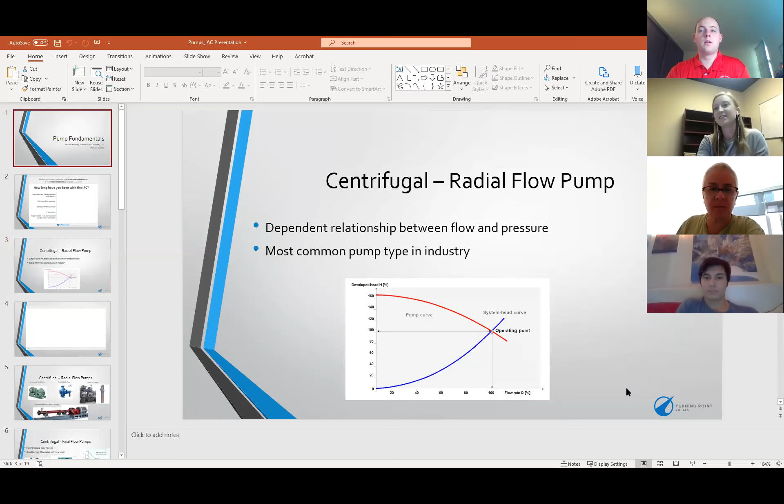As Julie said, I am an alumni of the U and of the IAC. I studied mechanical engineering while I was there and had a great time working with the IAC. Can everyone see my PowerPoint? Awesome, okay, so let's get started.

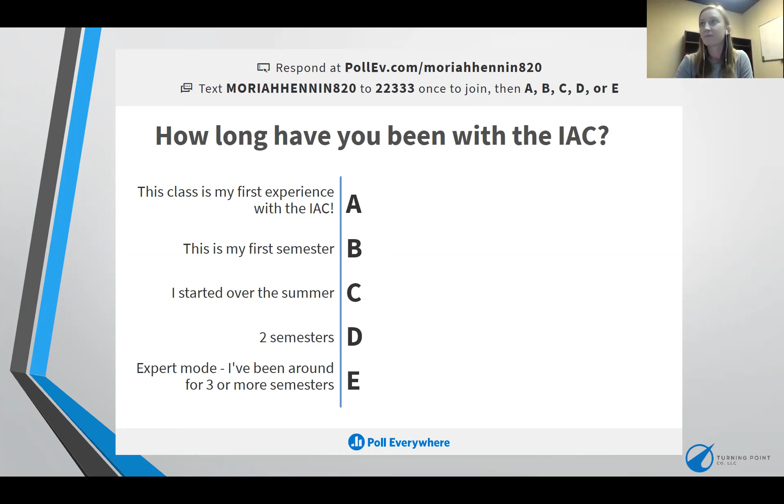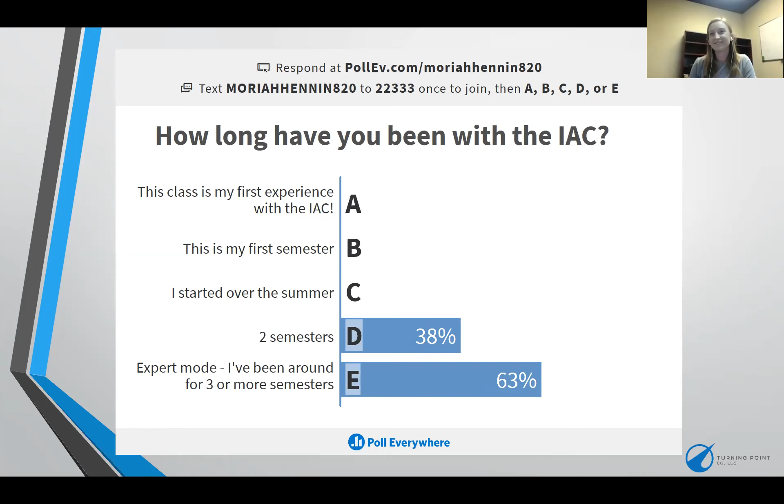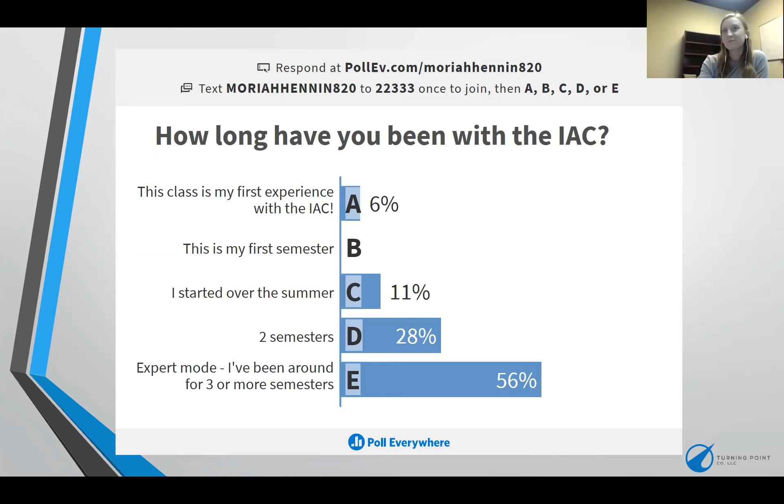Ooh, 2 semesters. This is cool, I've never used this before. Fun to see it in real time. Really awesome. You're seeing, by the way, Moriah, that right now our ebb and flow of the team is a little more veteran than typical, which is also kind of nice, which is really cool. Unexpected COVID positivity. It seems like answers have stopped coming in, so I'll move on. But cool, thanks for responding, guys. That's fun to see.

So getting right into it, I'm just going to go over some pump basics. So talk about a few different types of pumps, what those might look like if you're actually on site, and then go into more calculation-based, how are you finding the energy that those pumps are using. Then I'll specifically look at a situation where you have a throttle valve and a variable frequency drive, or VFD, and how you would compare those two. And then I'll also give you a quick overview of other things to pay attention to, and save some time at the end for questions.

So starting out, we've got centrifugal pumps, radial flow specifically. These are the most common types of pumps that I've seen in industry. They are good because they can deal with a pretty wide range of flow rates and pressures, and you are going to have a dependent relationship, which means as your flow rate changes, your pressure is going to be affected by that.

So, in the screen, let me see a second. Can you see my mouse? Yes? No? I see some yes and some no. Let's see if I can. I see the mouse now, Moriah. Okay, I think I need to change it to the laser pointer.

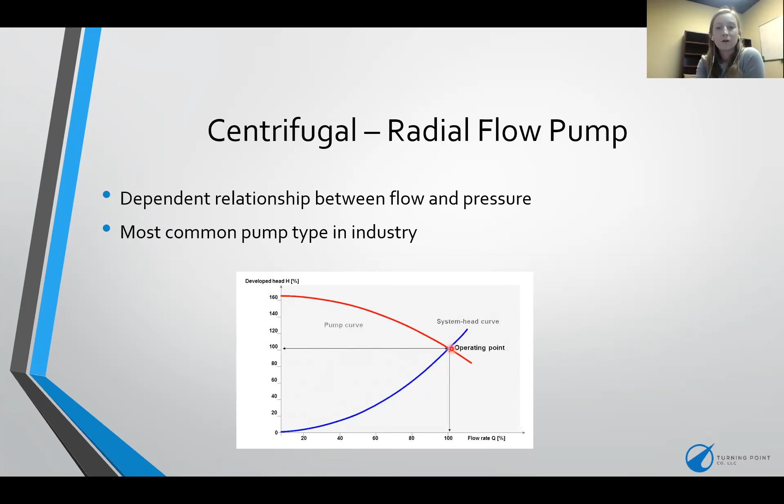Two really basic questions, if I could jump in on that previous slide. Can you tell the team how, just for starters, they would identify the type of pump and where they would get the curve?

Yeah, so on the next slide I have some pictures of pumps, so I will go into that. This right here is an example of a centrifugal radial flow pump. You can tell because it has an impeller, which, the rotating impeller is going to create a vacuum, pulling fluid in and pushing it out at a different pressure.

And so that's, sorry, things are popping up. Can you guys see that? Oh no. I'm able to see the pump. Okay, sorry, I had another screen pop up, so I was blocking it. We'll just go to the next slide. Sorry, y'all.

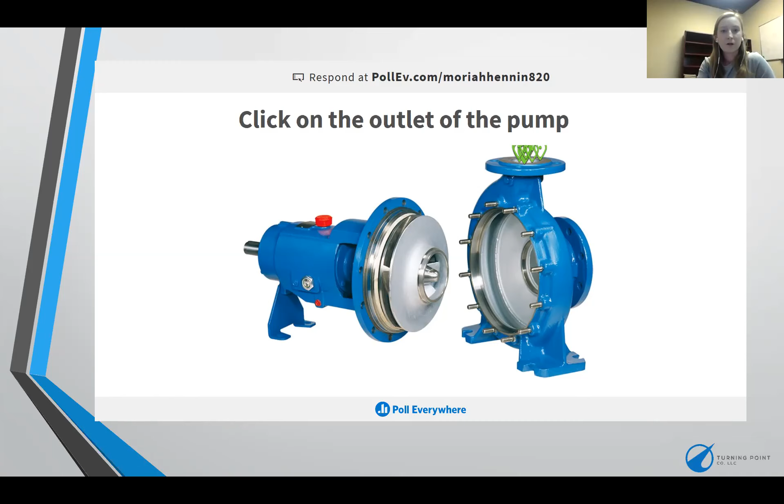Let's go to the next slide. Here's several different examples of radial flow pumps. So this is the same pump we were just looking at, except closed. And then you've got one with a horizontal split case.

The split casing is determined by your impeller direction. So if the impeller is going up and down this way, and your casing splits vertically around the impeller, then it's that radial split case. In this case, it's perpendicular to the impeller, so you've got that horizontal split case.

And then these are some multi-stage pumps, so you're not going to have just that one kind of container for the impeller. You'd have several impellers all along this multi-stage.

And you see this more in pipelines, which is something that I've seen quite a bit, where they're trying to pump further distances, so they need to get up to higher pressure. So you're going to have multiple impellers in line to get up to those higher pressures and pump further down.

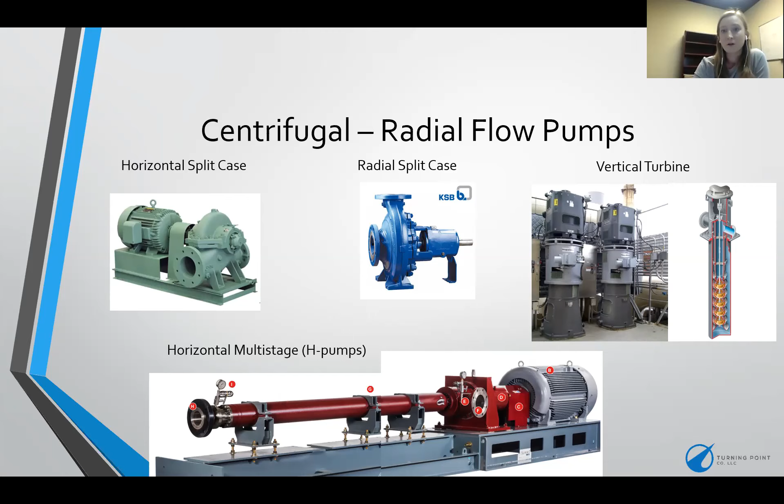So maybe when you're at the U and they're trying to pump all around the campus, they might need a multi-stage pump. I'm not sure on that one, but a different kind of pump that is not as common, but you could see, is a centrifugal axial flow.

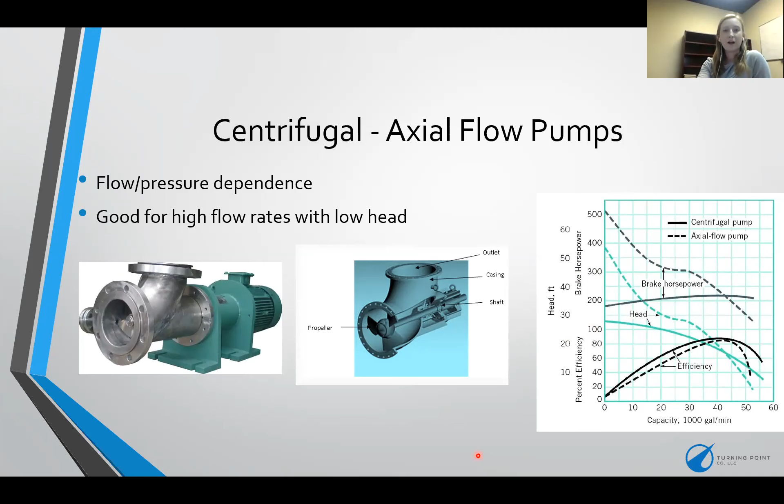And then the last type of pump, one of the three we're talking about, is the positive displacement pump. With this one, you have an independent relationship between flow and pressure, meaning you're going to have that set flow rate, and your pressure could be anywhere along this line.

It's defined by the system, and then your flow rate is going to be defined by the pump speed. So if your system's friction is changing—if you add a new pipeline to it, if you add maybe some turns in the pipe—then your pressure will go up, but the flow rate will remain the same.

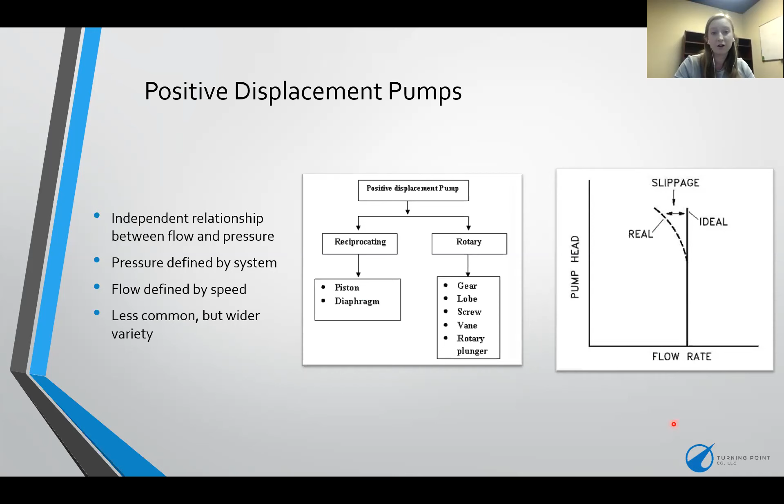So if you're trying to have really consistent flow rates and you don't have as high of pressure, the positive displacement pumps can be a really good option. They also have a lot of different variety in them.

So when you're looking around the site and see a pump that doesn't look quite normal, maybe it's a gear pump, which is just like interlocking gears. You've got lobe pumps, which are similar but more rounded gears. A screw pump is kind of like a rotary screw compressor—same idea, coming in and building up the pressure to the outlet.

So I haven't seen positive displacement pumps very much on sites. I think they're usually used for smaller flow rates, and yeah, they're not as common, but they do exist. They are out there. The only time I've seen a gear pump was actually in a research and development lab.

They were very good for very precise measurements of liquids. Otherwise, I haven't seen anything like this either. So, right—what do you consider smaller flow rates?

I mean, the pumps I deal with are usually pretty minimum big, like thousands of GPM. So small flow rates would be anything under 50 GPM maybe.

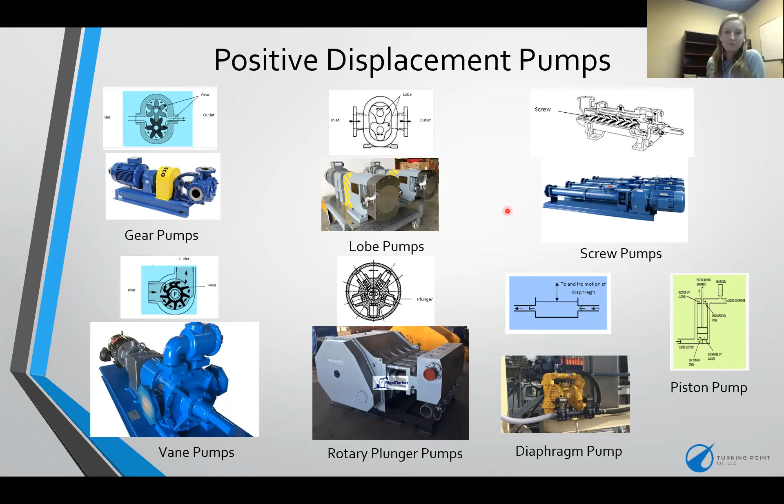So to answer Julie's question of where do you find those pump curves, I will address that in a later slide. I do have some resources for you all that are useful in finding pump curves, especially if you have manufacturer info on the pumps. So before we get to that, I'll jump into some common ways to calculate the energy a pump uses.

Affinity laws are the general way to compare different situations around pumps and fans. These apply to both. The basics are that your shaft speed is proportional to your flow rate, so if you have a motor that's at 50% speed, the flow rate will be 50% of the full capacity. This is useful because you can apply it to both the pressure head and power of the pump. The power is proportional to the cube of the shaft speed or your flow rate. So if you know the power a pump is using at full speed, its rated speed, and you have a flow rate you want to reduce it to, you could calculate the necessary speed of the pump.

This also works with a changing impeller diameter. One thing you'll sometimes see is that you can trim off around the diameter of the impeller, and that does the same thing as changing the speed. So rather than it being RPM 2 over RPM 1, it'd be diameter 2 over diameter 1.

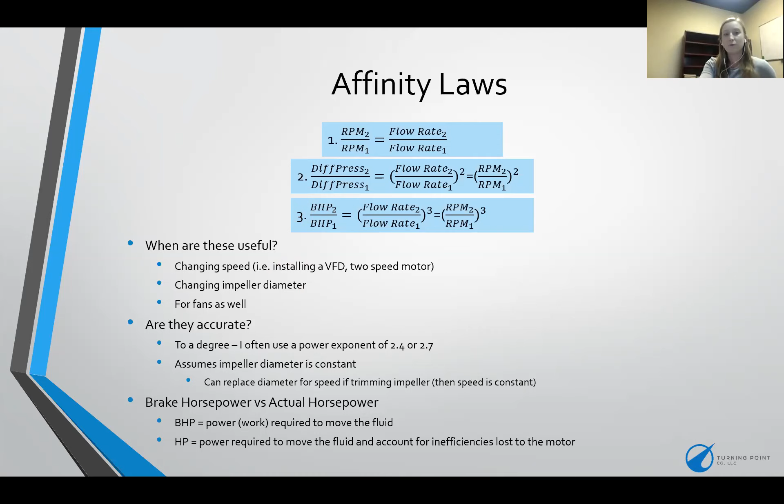So now the question is, if we want to know what the power is at a full flow rate, how do we find that? The answer is the pump power equation. Some of you have probably seen this, especially more experienced people. Pump power is just pressure times flow rate divided by your efficiency.

So I have a couple with units here that I find useful. If you have your head pressure in feet, then 3960 is your constant on the bottom to convert, and if you have your pressure in psig, then 1714 is that useful constant.

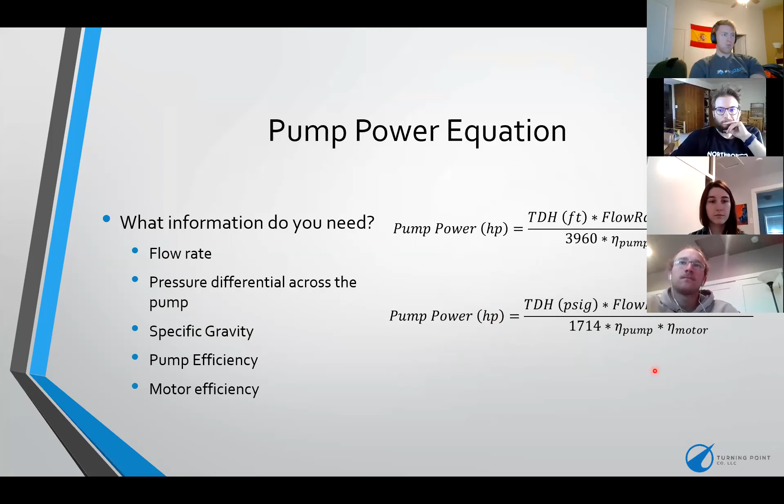The other thing to note with the pump power equation is that specific gravity plays a role. I'm actually realizing my bottom equation should not include specific gravity because your pressure would already account for that. But if you have your flow rate, or your head in feet, then specific gravity or your density has an impact on that pressure.

So if it's just water, then it's 1, and this equation is usually pretty spot on if you know your pump and motor efficiencies. If your specific gravity starts to get too far away from 1, or you have a slurry, then this equation may not be as accurate. So just something to keep in mind.

And so then for pump and motor efficiency, a good rule of thumb for pump efficiency is 65%, and for motor efficiency either 95% or finding NEMA efficiency tables online. NEMA is your motor rating, which most of you probably have seen on the motor nameplates. But 95% if you don't know is a good guess, and 65% for the pump efficiency. But if you have the curve, then you should be able to know that pump efficiency.

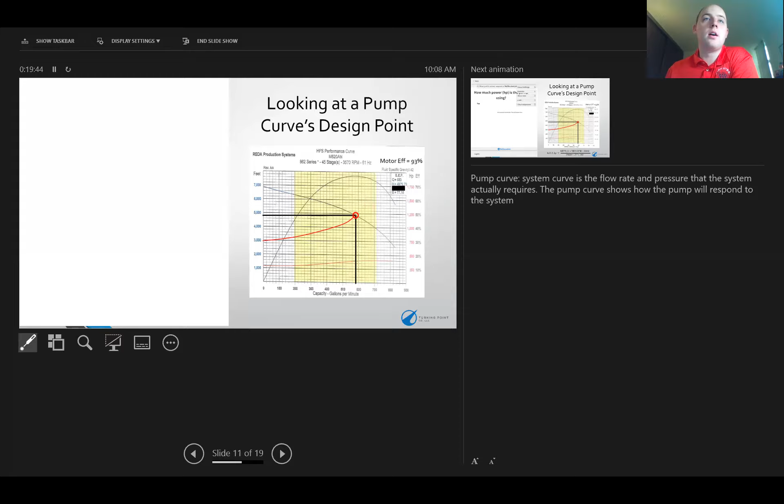Maybe. Are you all seeing the notes? Yeah, we can see the notes. Okay. If you go up to the left side to the display settings, it might let you switch screen. Looks good now? Yeah, just okay, the presentation mode. Cool. Can you guys see the question, or is it just a blank screen? All right. I cannot see a question right now. Okay, that's okay.

So I have an example pump curve here. The blue line is your pump curve, and I drew a red system curve there, which is your estimated point of where the pump is operating. If you guys want to try and use that pump power equation, we can talk about where you get each of the components from the curve.

Oh, I think it's finally loading. There we go, we got one answer in already. I'll give it a second. So do you guys need that equation again? Keep going. I could see the equation again. Okay. So it is, if I can pull it up here. Sorry y'all, I think these polls, I like the idea, but they're making the PowerPoint very slow.

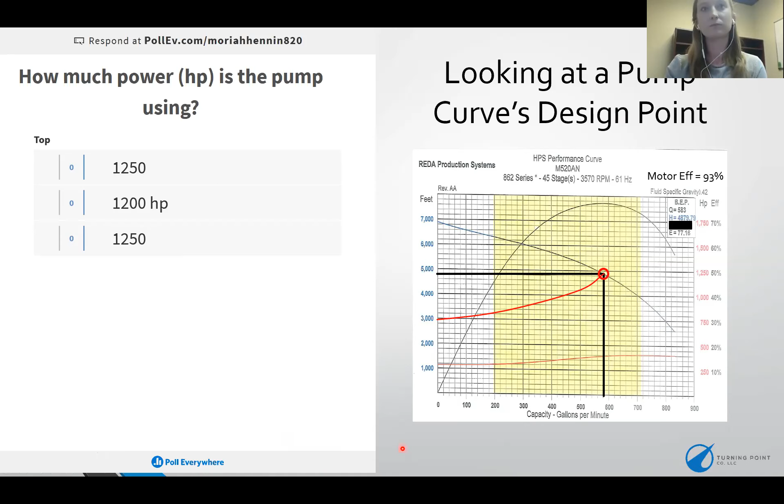Okay, so here's our equation again. We've got our head times our flow rate times our specific gravity, divided by 3960, times your pump efficiency times your motor efficiency. And I gave you a motor efficiency in that one of 95%, or 93%, I think.

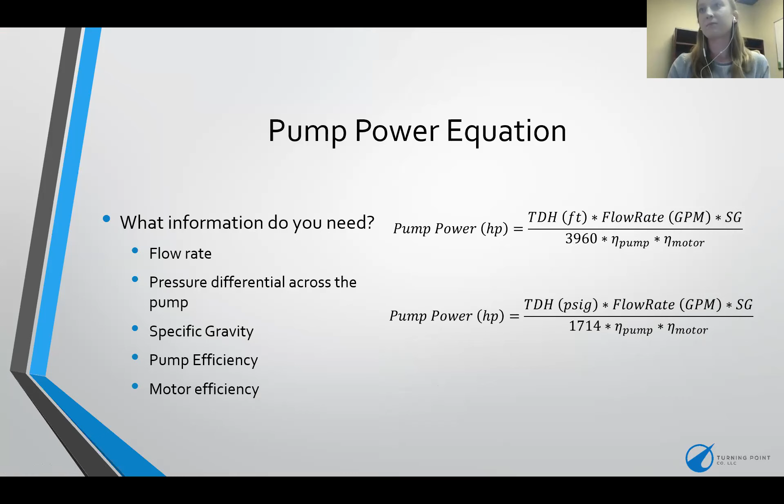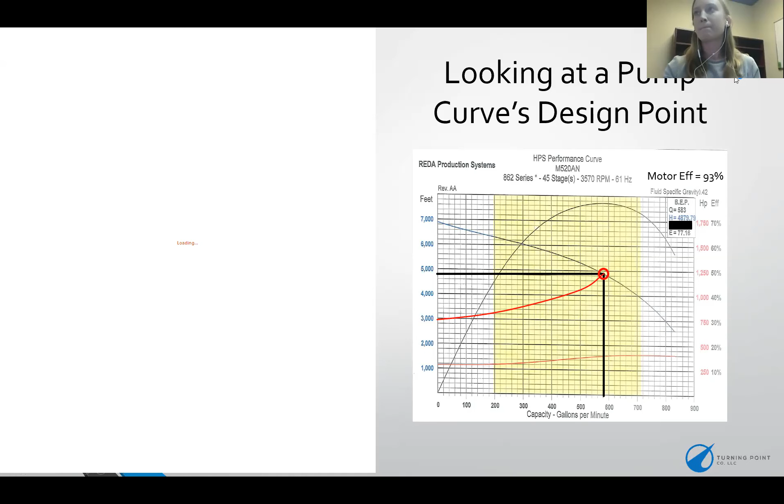Go back here. Oh, no. Okay, well, fortunately... okay, so it doesn't seem to be working, unfortunately, but we will go over it. I saw some answers of around 1250. So, does anyone want—I'll walk through what I have, and then if anyone wants to ask questions or say how they got to their answer, we can talk about that too.

This little box right here shows actually your design point, but it could be anywhere around 4,900, 4,800 feet for your head. This black line shows you right here, and then your flow rate is this other vertical black line, so you got 583 GPM. Your specific gravity was actually right up here in the corner. With the motor efficiency of 93%, specific gravity is 0.42, divide that by your 3960, and then pump efficiency—if we just follow this line straight up to the efficiency curve, and then over to the right.

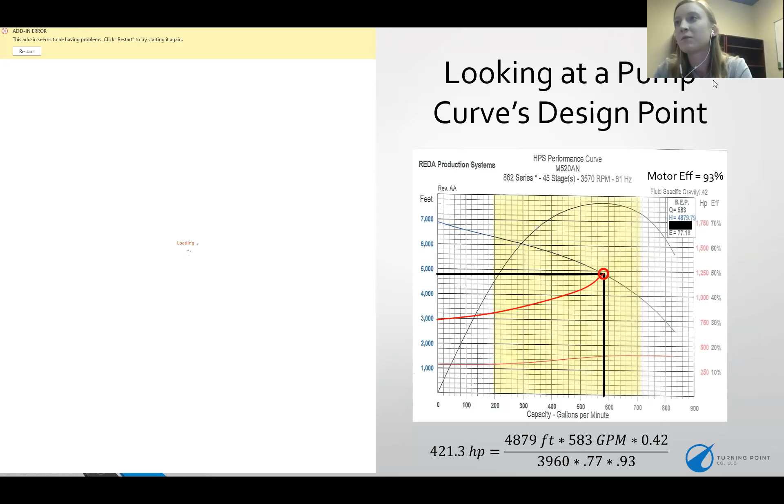And you guys can't see your faces, can you? No, that's in the way of mine. I'm sorry, I'm not used to Zoom. What was your question, Moriah? Your faces are all on my slide, so I didn't know if that was blocking your view of the curve. I can see it, yeah, I can see the curve.

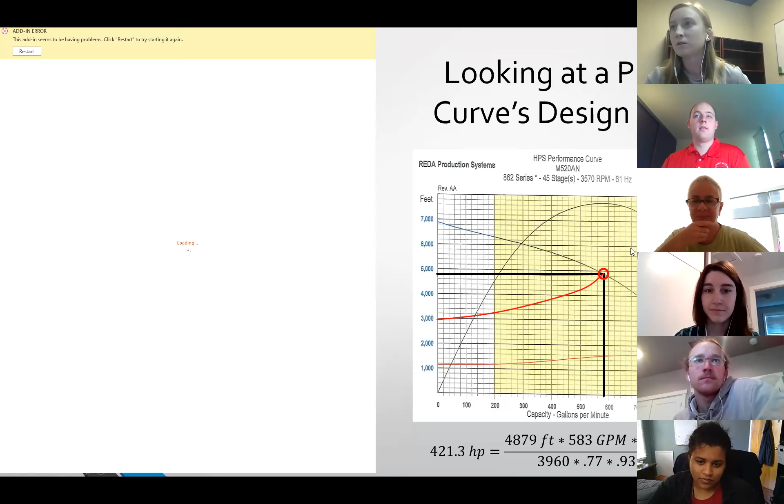Perfect, okay. So if we follow this point up and then go over to the right, our efficiency is just around 77%. So then we take 77% pump efficiency, 93% motor efficiency, for a horsepower around 421. So if you have anywhere around there, that's about where we're looking.

I think we all did horribly. Did anyone have thoughts or questions on why any of these numbers are the way they are? Suddenly a couple of our students are getting it right. I don't know how they did that.

Awesome, Moriah, how did you eyeball such specific numbers? That's one thing that occurred to me as you were going through it. Yeah, so I didn't actually eyeball those—if you notice, I cheated. There's a box right here that gives you the best efficiency point. So I used the values given in the best efficiency point, which is this operating point right here. So if you had anywhere close to those values in this scenario, that would be totally fine. I just used that best efficiency point, which is, as you can see, the highest point on the efficiency curve, to direct my calculations.

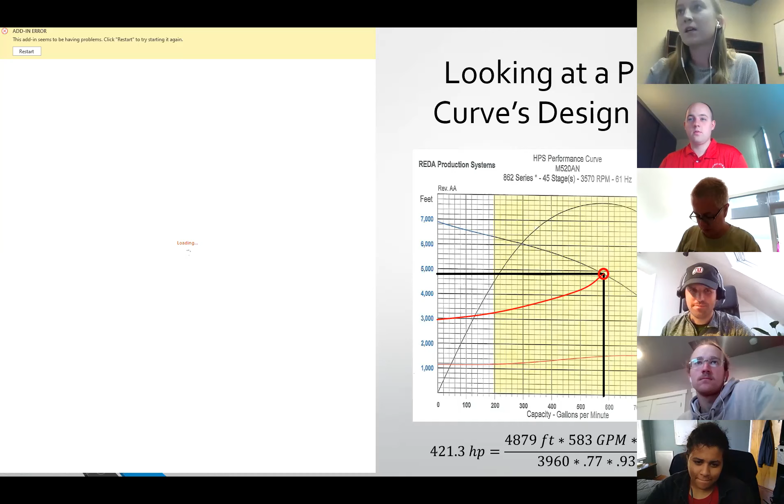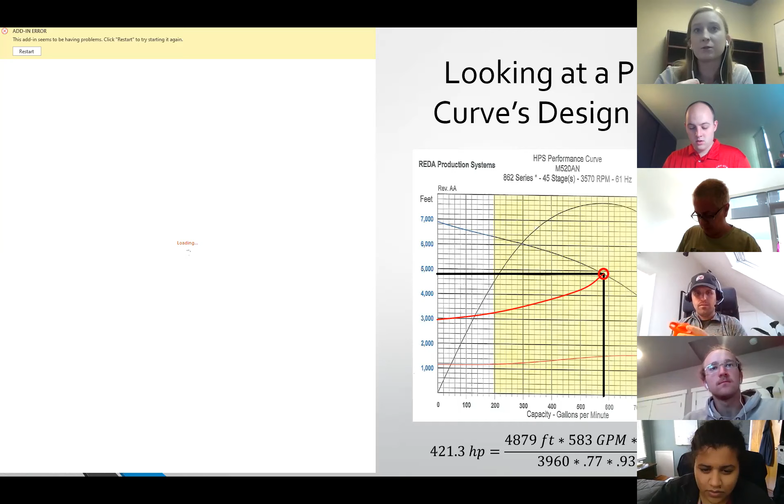It's important to remember to ask what the specific gravity is if you know the fluid is not water, or at least what the fluid is. Because oftentimes we'll see glycol mixed with water in our situations. So it's important to take into account because that can wildly affect how much power the pump consumes.

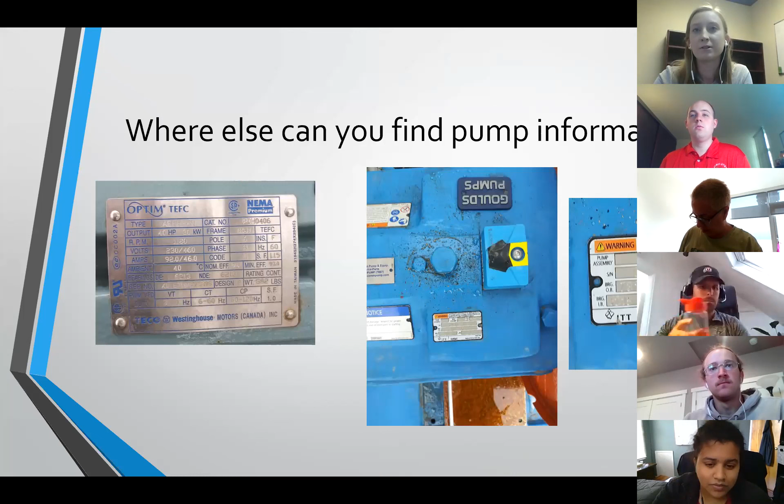So now going back to Julie's question, where can you find information that can lead you to the pump curve, or information you need to perform that pump power calculation?

On the left here, we've got the motor nameplate, where you can get the horsepower of the motor to compare to your pump power equation. If you calculate something that's way outside of the motor horsepower, then you probably did something wrong and should rethink that. But if you're pretty close, it should always be less than the horsepower, unless they're operating it at the extreme end of the pump's capacity. Other than that, it should usually be less than the motor's horsepower. You can get the nominal efficiency off of the nameplate.

On the right, I have an example of a pump nameplate. I zoomed in since it was a little hard to read, but you can get the serial number and some other nameplate information. You can see it's a Goulds pump, and then take that information and do some research if you don't already have a pump curve.

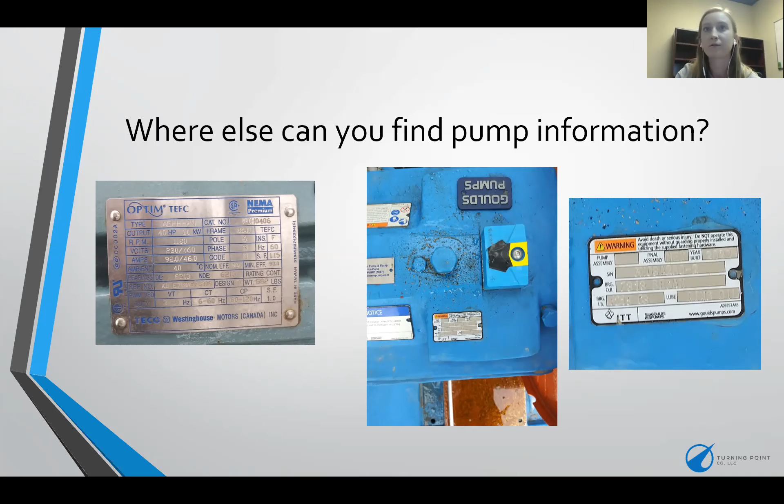Where do you do that research? Pump-flo.com is a great place to look for curves if you have the manufacturer name. They have a wide variety of pump types and manufacturers, and you can either enter in specific conditions that you know the pump is under, or look for a specific pump type.

Flowserve.com is its own manufacturer, but I've found it useful when trying to look at sizings of pumps. So if I know a pump is really oversized, I could go on here and try to find a way to search different pump options based on the conditions I know it should be operating at. Say the pump is designed for 500 GPM, but they actually only need 100 GPM, then I could go on here, enter 100 GPM with a specific pressure head, and find more ideal pumps with better efficiencies and perhaps lower motor power that could be more appropriate.

Since I'm not a pump designer, and I know you all are not pump designers, this isn't meant to say they should buy this specific pump. It's more just meant to help you get an idea of what power they actually would need given specific pump conditions. So these are just tools that I have found useful, and you can get curves off of both of them.

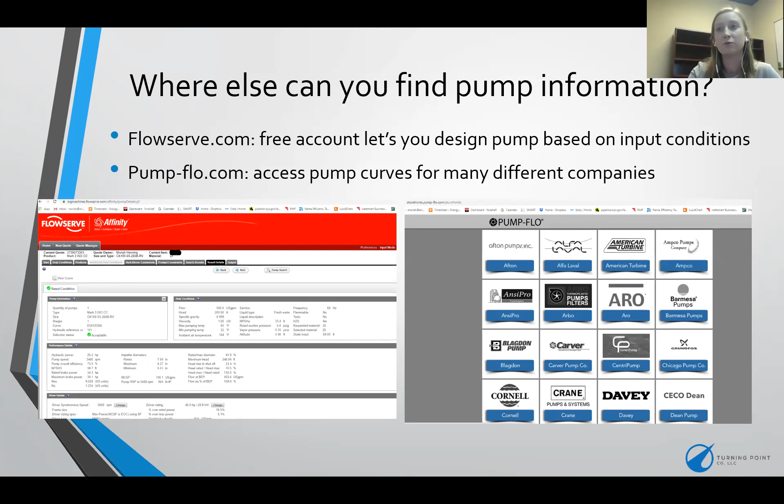So now let's jump into pump control. Looks like we don't have too much time left, so I will try not to spend too much time on this.

The different types of pump control that I have often seen: the easiest one to do is just a recycle bypass line. This means the pump is going at its full flow rate, and somewhere downstream of the pump they have a line going back, recycling that flow rate, and anything not recycled then moves downstream. So the pump sees full power 100% of the time, even though downstream they might not get 100% of the flow rate. Then there are throttle valves, again downstream of the pump, where they'll have a valve that they can close off flow rate, and this pushes pressure back up.

Let me see if I can get my mouse again.

While Moriah's doing that, I'll just chime into the U of U water distribution assessment team. We're most likely going to see bypass control options there when we get to the building. Okay, alright, I think I got my mouse back.

So for a throttle valve, the red line shows the full capacity system curve. As you close that valve and limit the flow rate going through it, that pushes the pressure higher on the pump, so it will follow the pump curve, that blue line, until you reach the appropriate flow rate.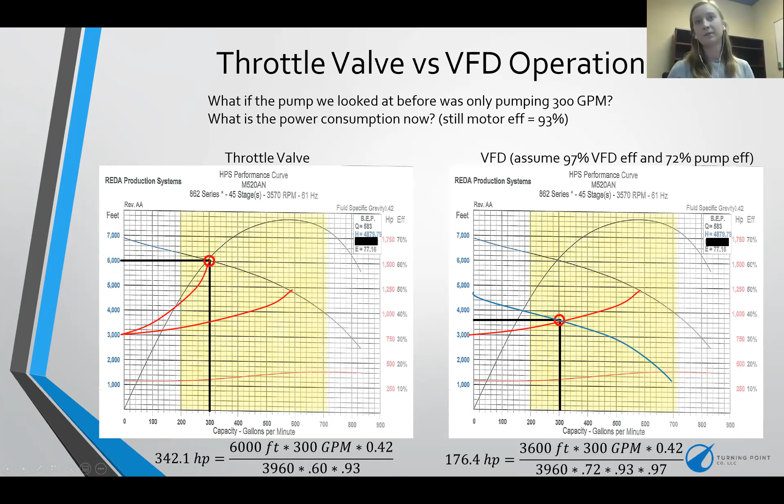So, just some last recommendations besides VFDs.

Hey Moriah, before you go past that, I want to ask one topic that comes up often: do we include demand and usage savings with VFDs or not? Can you comment on that really quick?

Yeah, I think it would depend on the system and whether a VFD is being used to control a lower flow rate all the time or just some of the time. If it's just some of the time, then demand shouldn't be included. If it's a lower flow rate most of the time, then I would say yes, include demand. Also, sometimes we use an average demand, which is kind of wonky because it doesn't represent the demand they see on their bill each month, but rather says on average you'll see a lower demand than you do right now, and then use savings off of that.

Yeah. So back to our recommendations. Oh no, I'm not saving time.

So many pumps are oversized just due to the way manufacturers install pumps. If you see a pump that's operating way to the left of its curve, so at a lower flow rate than it's designed for, it could be a good candidate to install a totally different pump with a smaller motor.

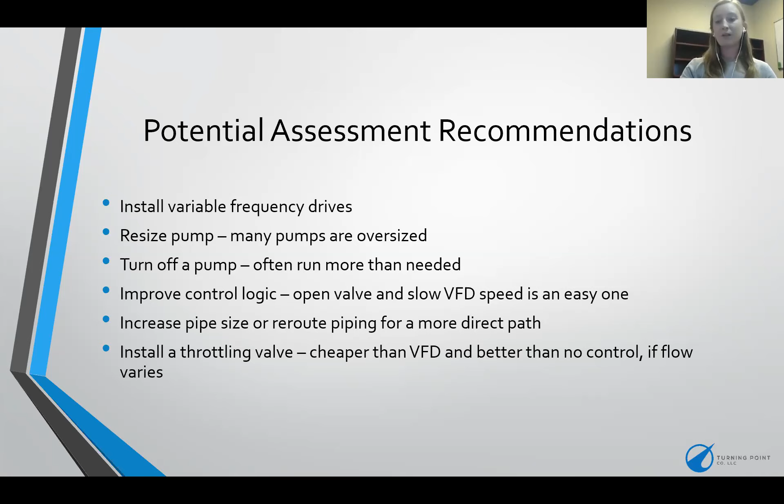I'll jump in and say this is a great roadmap for the U of U team. These are options we should be looking at. Also, for any future water distribution assessments that we do, those are all good things to look for.

Awesome. Yeah, so this is my last slide. One thing I didn't really get into in this presentation at all is configuration of pumps. It's very important, so I included a couple pictures of curves with series or parallel operations.

Some of you are asking about costing. A lot of the costing we do is based on quotes, which I know is not always possible for y'all to get, but vfds.com is helpful for cost estimates for low voltage VFDs and motors.

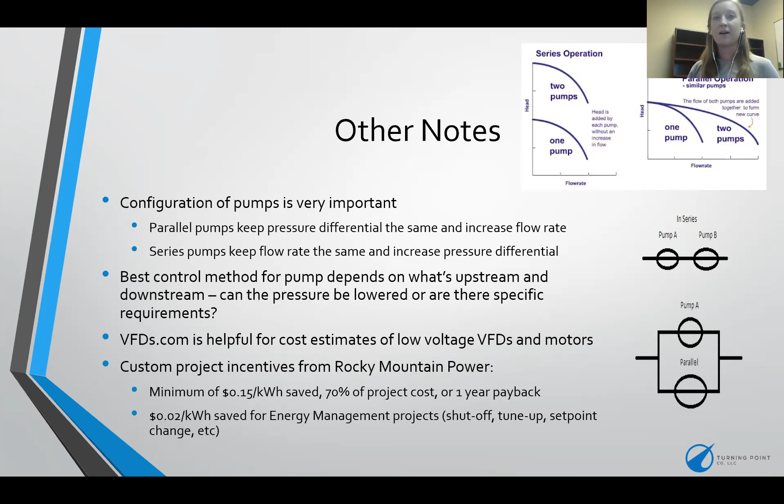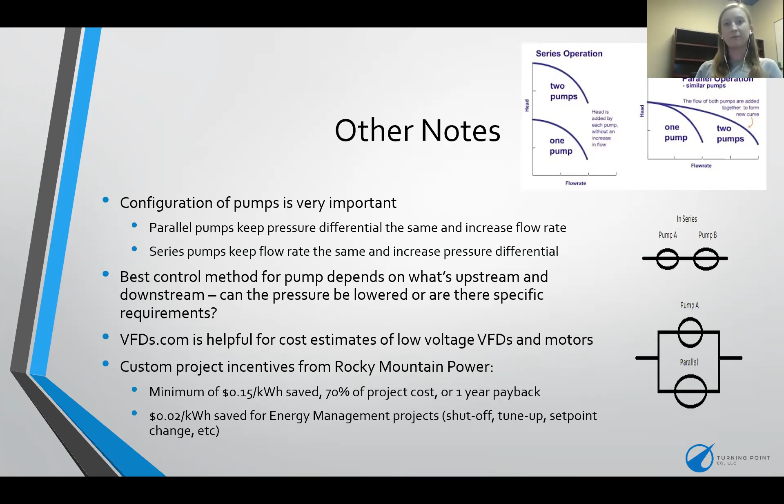Last note, if you're wondering how we calculate our incentives, it's pretty simple for capital projects. It's the minimum of those three options: either 15 cents per kilowatt hour saved, 70% of the project cost, or however much money puts the project at a 1-year payback. If it's an energy management project, which would be some sort of shutoff, a tune-up of system controls, a set point change, something that doesn't cost very much money for the customer, then it's 2 cents per kilowatt hour saved.

So I know I'm at time. I'm sorry about that, y'all. But does anyone have any questions?

It's actually perfect timing, Moriah. You kind of nailed it compared to our normal speakers, so awesome. Obviously, if people need to go, our class time is up now, but sounds like Moriah is willing to hang out with some questions for a little bit. You're also welcome to stay and take the opportunity to ask her any questions about pumps while it's on your mind.

Moriah, there seems like there might be a question in the chat. Are you able to access that? Let's see, chat. Yes.

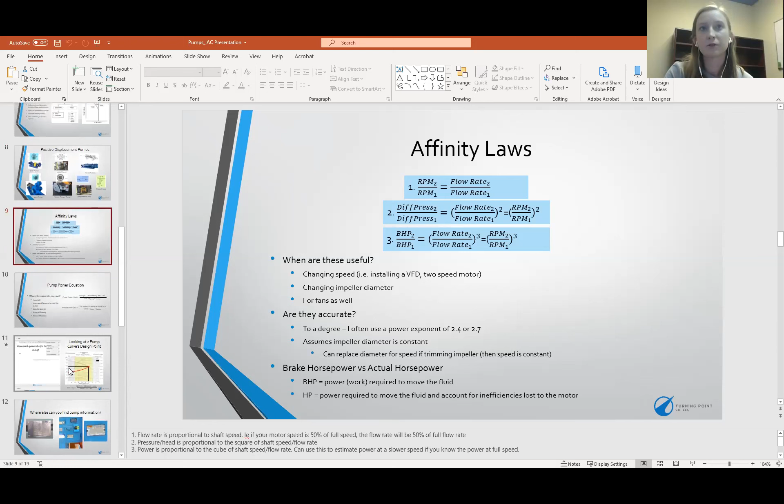Typically, we don't. The system curve itself takes into account your friction losses; that's what the system curve is. So if you know what the system curve and the pump curve look like, you don't necessarily have to calculate those friction losses. However, if you're looking at piping changes, that's when I would start taking friction into account. There are some common equations online, and also tables of friction factors in general—pipe size, pipe schedule, pipe length and diameter—all of those fluids things you have to take into account. So if you're just looking at the pump itself, the pump curve should be sufficient. If you're diving into more of the piping stuff, that's when you have to start paying more attention to your friction losses.

Thank you. Going once, group? Any more questions for Moriah? Sounds like crickets to me, Moriah, which means everybody is happily satisfied and has no more pump questions and is ready to be experts. All right.